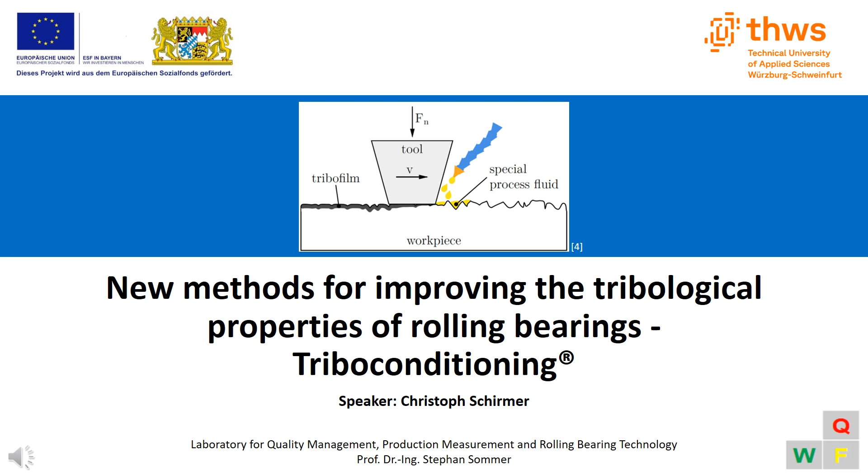Now I will briefly present the agenda. First, I'll state the motivation of this presentation, clarifying the question of why tribological properties should be improved or optimized. Then I will discuss triboconditioning. This includes the basic idea of the process, the associated surface chemistry, that is, the chemical reactions that take place during the process, and the surface topography that results from the treatment. I will conclude this topic with the surface properties that result from triboconditioning.

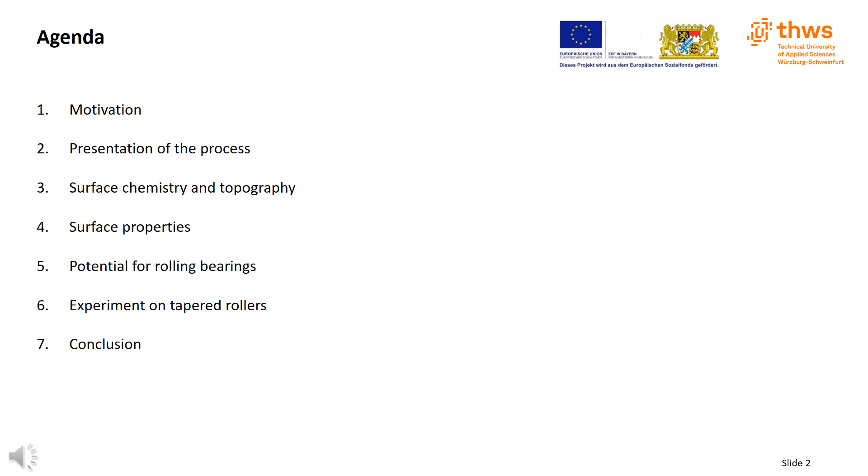After that, I will discuss the potential of the process for rolling bearings and present a first experiment that the THWS conducted on tapered rollers. In the conclusion, I will summarize the main aspects of this presentation and give a short outlook on future topics concerning triboconditioning of rolling bearings.

The energy transition and resource scarcity call for efficient and sustainable solutions. This obviously also applies to rolling bearings. One topic for achieving such solutions is the improvement or optimization of tribological properties. So what does this mean? Tribology consists of three fundamental areas: friction, wear, and lubrication. In the tribological optimization of rolling bearings, friction is to be reduced in order to minimize power losses. This results in better efficiency. Likewise, reduced wear leads to longer service lives of components and systems.

For rolling bearings, in addition to improved geometries, materials, and lubricants, special treatment and coating processes can be used to improve tribological properties. Triboconditioning would compete with conventional processes like burnishing and coating. All these processes aim to improve tribological behavior, especially under deficient lubrication.

On the left you can see a burnished rolling bearing. The surface contains various iron oxides, which improve the friction and wear behavior. In contrast to a friction and wear reducing coating and triboconditioning, burnishing additionally protects against corrosion. In the center you can see PVD coated rolling elements of a spherical roller bearing. This is a carbon coating which is very hard and reduces wear.

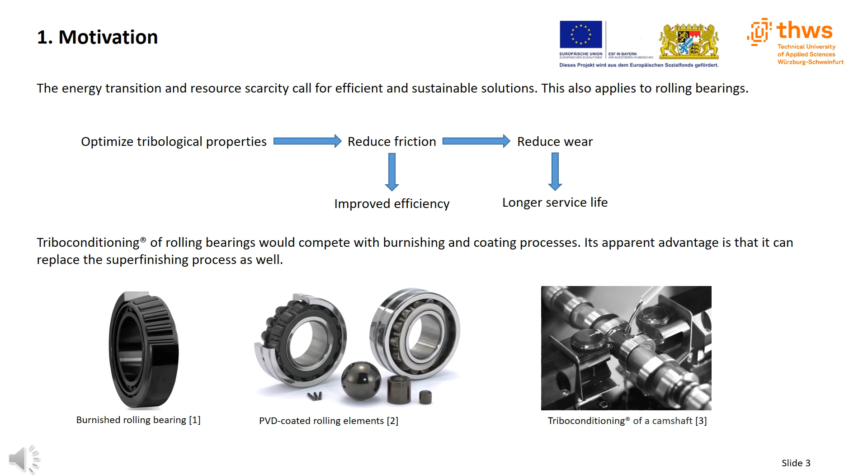Now I would like to present triboconditioning. Triboconditioning is a surface treatment method developed and patented by Tribonex, a small company from Sweden. In the left picture, the logo of the company is shown. The link tribonex.com, which can be found in the video description, takes you to the company's website. There you can find more information about triboconditioning as well as contact information. Triboconditioning is a protected trademark from Tribonex.

The aim of this treatment is, as already mentioned, the improvement of tribological properties. The illustration on the right shows the principle of triboconditioning. A hard tool is drawn over a workpiece surface with high contact pressure under continuous feed of a special process fluid. This smooths the surface, and tribochemical interactions take place between the process fluid and the workpiece. The result is a plateau-like surface with a tribofilm, also called tribolayer, which contains an embedded solid lubricant.

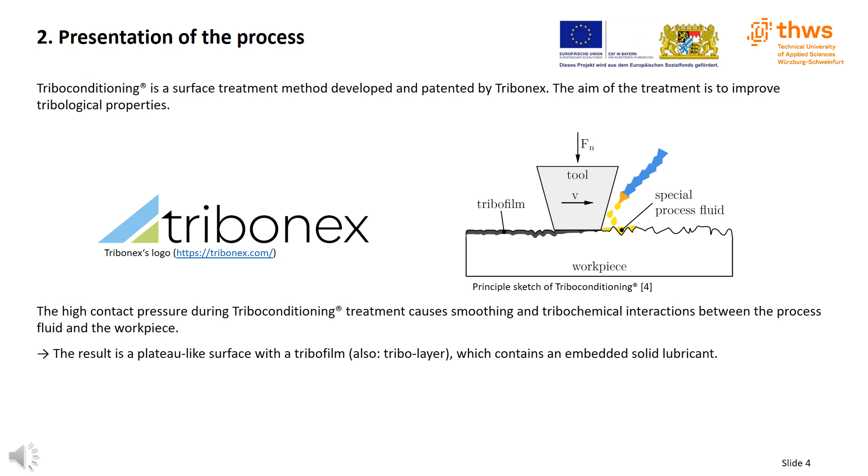Triboconditioning can be implemented in two different process variants: triboconditioning round shape, which is used for round geometries, and triboconditioning complex geometry, which is used for complex geometries and small parts. For triboconditioning round shape, shown on the left, a honing tool, a pin, or a disc can be used. All tools have in common that they are made of carbide and that the process fluid is continuously fed.

The honing tool can be used for internal geometries. It oscillates along the axis of the bore, while the workpiece or the tool perform a rotational movement. The pin can be used for external geometries. It performs a pivoting motion while the workpiece rotates. For a shaft shoulder, the disc is a suitable tool. In addition to surfaces parallel to the axis of rotation, the disc can reach shaft shoulders through face contact.

For the treatment of rolling bearing raceways, it is possible to adapt standard tools to triboconditioning. Such standard tools can be grinding and honing tools from the rolling bearing industry.

For triboconditioning complex geometry, shown on the right, basically all mass finishing processes can be used. An oil-based process fluid containing triboconditioning additives is used. The grinding media is high in density in order to generate a large impact. The preferred mass finishing processes for triboconditioning are centrifugal barrel finishing and stream finishing.

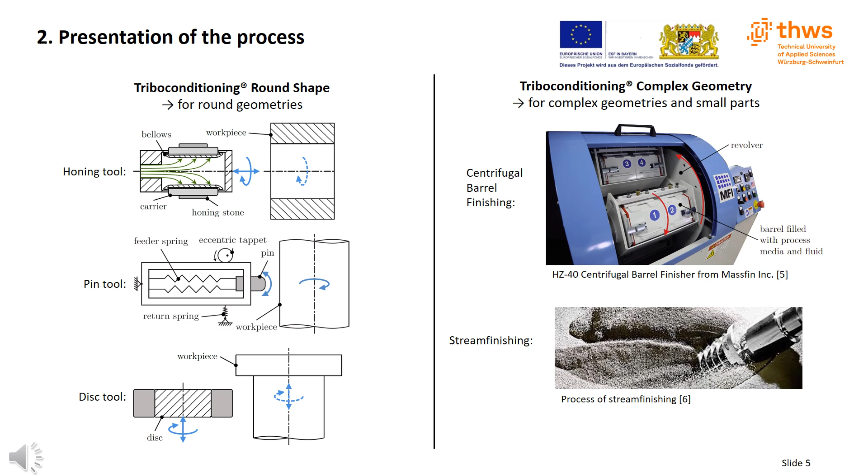For internal surfaces, the stream finishing process shown below is preferred. The workpieces are clamped on workpiece holders and immersed in a flow bath of process media and process fluid. In addition to this flow, the workpiece is rotated.

Now I'd like to take a closer look at the surface chemistry. During triboconditioning, thermomechanical influences such as heat input, abrasion of oxide layers, and deformation provide for increased chemical reactivity.

I will briefly introduce the reactions that are believed to occur during triboconditioning. The process fluid contains an organic sulfur complex RSR and tungsten trioxide WO3. Since iron is an important reactant to the reactions shown, the workpiece must be made of a ferrous material.

In the first line, the organic sulfur complex from the process fluid decomposes as a result of friction, and a sulfidation of iron from the workpiece to iron sulfide FeS occurs. In the second line, the reduction of tungsten trioxide by iron forms a tungsten trioxide complex. The above-mentioned products react to tungsten disulfide WS2 and iron oxide FeO, as can be seen in line 3. Finally, the reactions are summarized in line 4.

The tribochemical reactions shown are equilibrium reactions, occurring in regions of sufficient energy input. The tungsten disulfide represents the solid lubricant incorporated in the tribofilm.

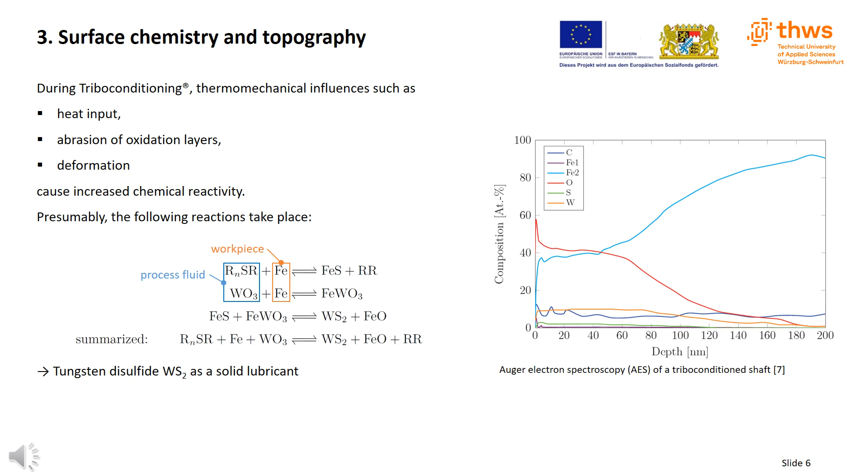In the Auger electron spectroscopy of a triboconditioned shaft, shown on the right, small but relevant amounts of sulfur up to 120 nanometers are detectable. This corresponds to the thickness of the tribofilm.

The surface topography is significantly changed as a result of triboconditioning. This is because material close to the surface is plasticized and made flowable. The peaks of the profile are smoothed and the valleys are partially filled. This results in a plateau-like surface.

The figure shows the surfaces of a cylinder liner by means of secondary electron microscopy. The left figure shows the surface before triboconditioning, the right figure after triboconditioning. It can be clearly seen that most of the finer grooves are eliminated due to triboconditioning. However, larger grooves remain. Such a topography with plateau character influences the friction behavior favorably.

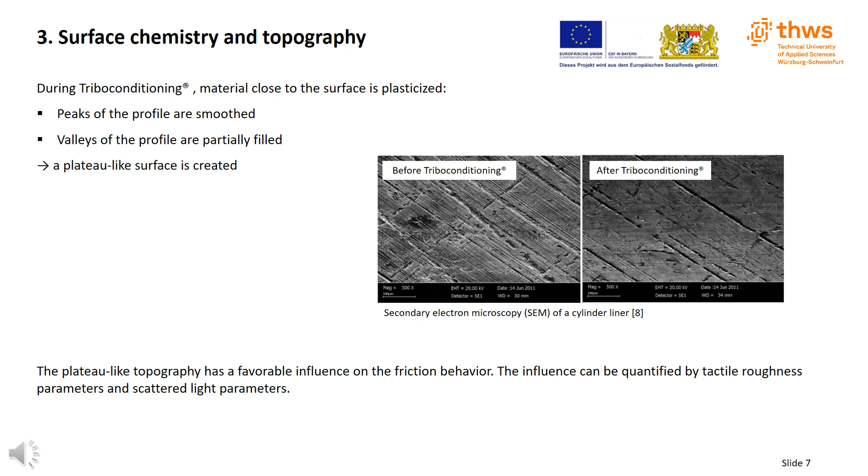The influences can be quantified via tactile roughness parameters and scattered light parameters. On this slide, I will present some tribologically meaningful tactile roughness parameters that change as a result of triboconditioning. First, I would like to briefly discuss the parameters from the material ratio curve, also called bearing area curve or Abbott-Firestone curve. On the right, you can see an exemplary roughness profile with the corresponding material ratio curve.

By graphical construction in the material ratio curve, the reduced peak height RPK, the core roughness RK, and the reduced valley depth RVK can be derived. Triboconditioning reduces all three of the mentioned parameters.

The reduction of RPK reduces wear, especially during running in. A lower RK value increases the contact area and therefore increases the load-bearing capacity. Reducing RVK slightly reduces lubricant retention.

Now briefly to R delta Q. This parameter describes the root mean square value of the local slopes of a profile. Triboconditioning makes surfaces smoother, so the value decreases. This leads to easier lubricant film formation.

RSK is the skewness of a profile, that is, the asymmetry of the amplitude density curve. The smaller or more negative this value is, the better the load-bearing capacity of the surface. Triboconditioning leads to a reduction of this parameter.

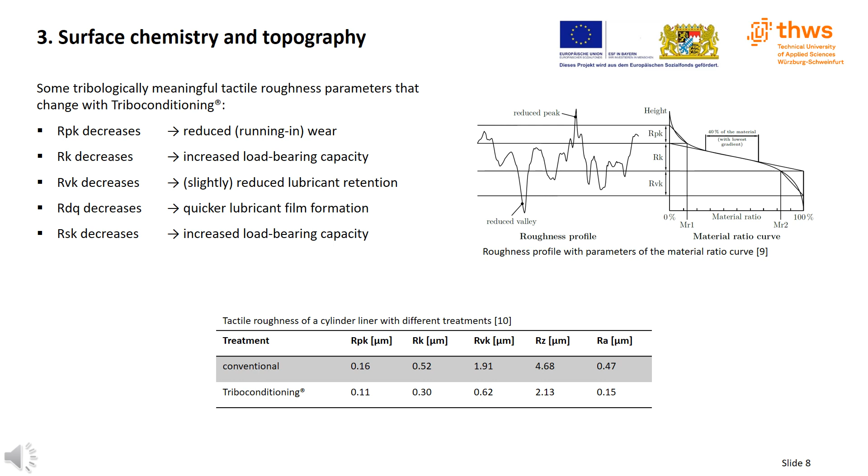The table below shows some tactile roughness parameter values on a cylinder liner. Here, conventional treatment is compared to triboconditioning. It is evident that the roughness values from the material ratio curve, as well as classic roughness values Rz and Ra, are reduced due to triboconditioning.

The result is an intensity or frequency distribution of the scattered light over the scattering angle. The scattered light parameter AQ corresponds to the variance of the scattered light distribution. Because the scattering angles are evaluated, AQ is a measure of profile slopes. The lower the AQ value, the shallower the slopes of the profile are, meaning the surface is smoother.

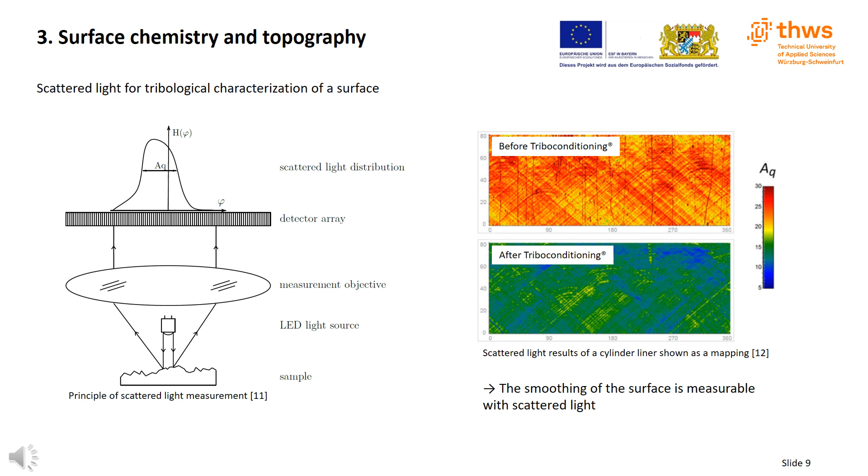The figure on the right shows the results of a scattered light mapping on a cylinder liner. The surface before triboconditioning is shown at the top and after triboconditioning at the bottom. Before triboconditioning, the AQ values are between 20 and 30. After triboconditioning, AQ values between 10 and 20 are achieved. The AQ value is almost halved, which indicates significant smoothing.

The influence of triboconditioning on the friction properties can be illustrated using a Stribeck curve. In the Stribeck curve, the coefficient of friction is on the y-axis with the Hersey number on the x-axis.

At low Hersey numbers in the dry friction regime, the solid lubricant tungsten disulfide reduces friction (C1). Furthermore, the range of mixed friction is shifted to the left towards higher loads and/or lower speeds (C2). This is due to the plateau-like surface that facilitates lubricant film formation.

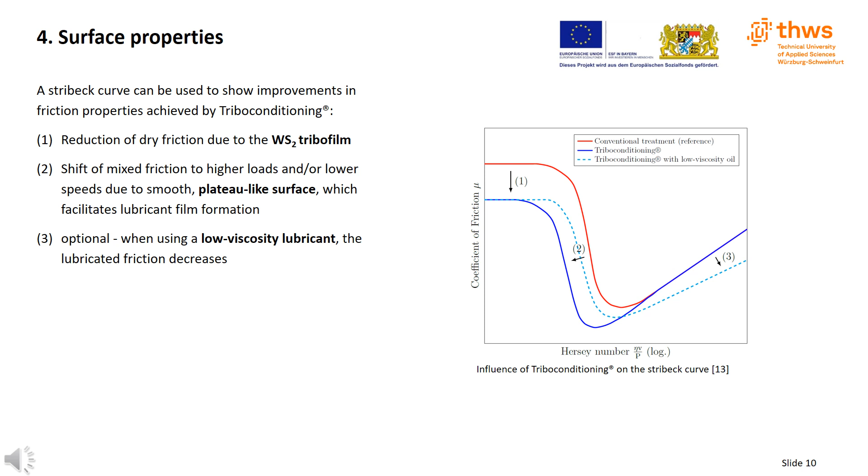Optionally, triboconditioning allows the use of a low viscosity lubricant. Although this shifts the range of mixed friction somewhat to the right, the lubricated friction, that is the friction at higher Hersey numbers, decreases (C3).

The wear of a triboconditioned surface is also reduced. There is low running-in wear and less fatigue damage because the smooth surface profile contains hardly any prominent profile peaks and has good load-bearing capacity. Furthermore, the tribofilm offers a certain resistance to cold welding.

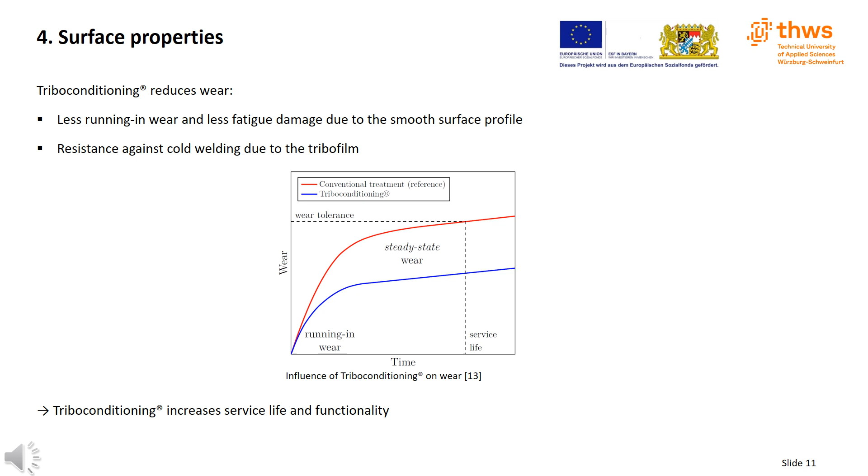As a result, the amount of wear at the beginning of the so-called steady-state wear is lower than that of the reference part. At a given tolerance level, this leads to a longer service life and increased functionality due to triboconditioning. During operation, wear of the tribofilm cannot be avoided.

However, there is a self-regenerating effect due to tribochemical reactions between the surface and the lubricant, or rather its additives. Therefore, the reactants of triboconditioning must be matched to the lubricant in the subsequent application. Thus, unfavorable triboreactions associated with adverse changes in the properties of the surface can be avoided.

An alternative for tungsten is molybdenum. Furthermore, sulfur can be substituted by phosphorus.

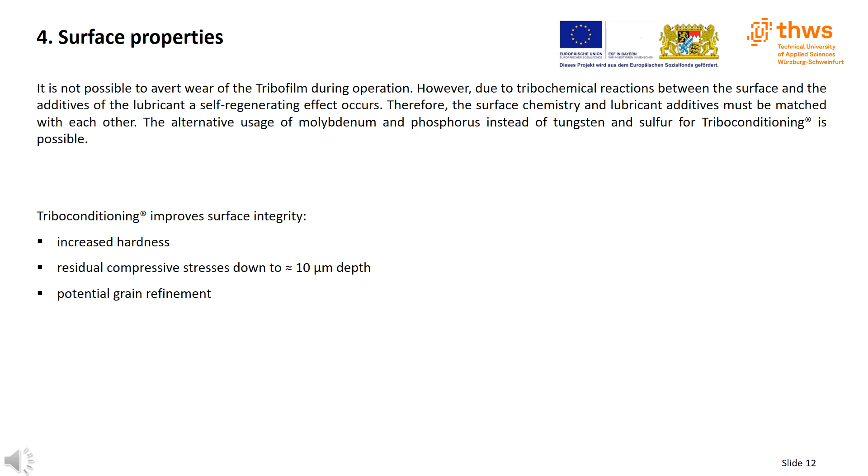In addition to friction and wear behavior, triboconditioning also improves surface integrity. The near-surface compaction leads to increased hardness and residual compressive stresses down to a depth of approximately 10 microns. In addition, grain refinement can potentially occur due to deformation and friction during triboconditioning. This would have a positive influence on strength, toughness, hardness, as well as tribological properties.

For rolling bearings, triboconditioning is particularly relevant in the presence of temporary insufficient lubrication. The cause of insufficient lubrication in rolling bearings is poor friction conditions that prevent the formation of a load-bearing lubricant film. Such conditions exist, for example, during startup and shutdown of rolling bearings. In addition, low speeds paired with high loads can lead to insufficient lubricant film formation.

In large bearings, the rolling elements are extremely accelerated when they enter the contact zone, which can tear the lubricant film open and thus also result in solid contact. This is referred to as slip in rolling bearings.

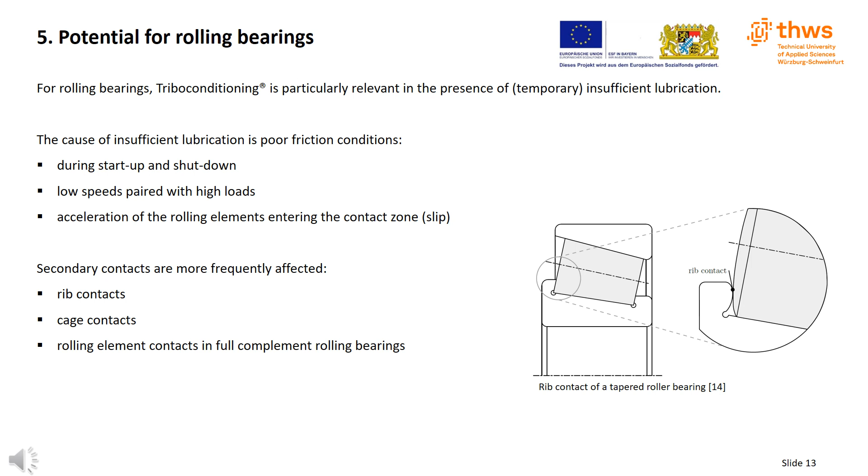With conventional finishing, a honing or superfinishing follows in order to adjust the surface quality and cut roughness peaks. Then the component is burnished. Iron oxides are formed on the surface which improve the tribological behavior and have a passivating effect.

With triboconditioning, the last mentioned processes of superfinishing and burnishing can be combined in one. Like superfinishing, triboconditioning improves the surface quality, and like burnishing, triboconditioning changes the surface composition by incorporating iron oxide FeO. In addition, a solid lubricant such as tungsten disulfide is produced.

Adapted standard tools and mass finishing processes can be used to apply triboconditioning to rolling bearing components. The only requirement is that the components must be made of a ferrous material, for example steel or cast iron.

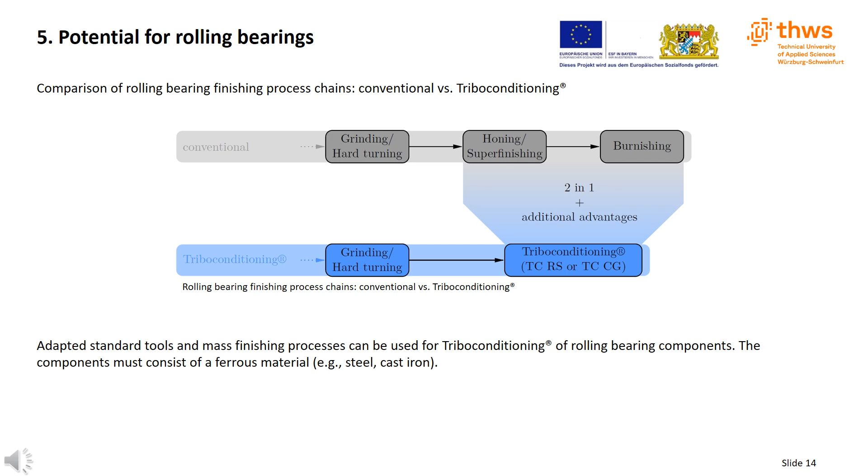To investigate the effects of triboconditioning on tapered rollers, an experiment was carried out. The subject of the investigation were 10 tapered rollers from a passenger car wheel bearing. 5 were left in the standard, honed condition, and the other 5 were additionally triboconditioned. The two test groups are referred to as Standard and Tribonex.

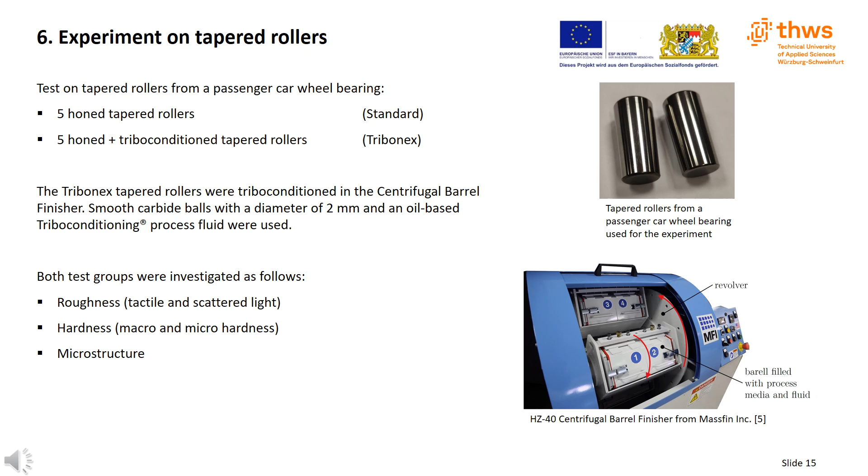In both test groups, the roughness was measured tactilely and with scattered light. In addition, macro and micro hardness were checked. A possible difference between the micro hardnesses could indicate an increase in residual compressive stresses due to triboconditioning. Finally, the microstructure was examined under an incident light microscope to detect potential grain refinement.

At the roller circumference, no influence of triboconditioning can be determined - that is the direction of the grinding process. At the roller face, RPK remains unchanged. RA, RK and RVK decrease by approximately 25%, and R delta Q decreases by approximately 38%.

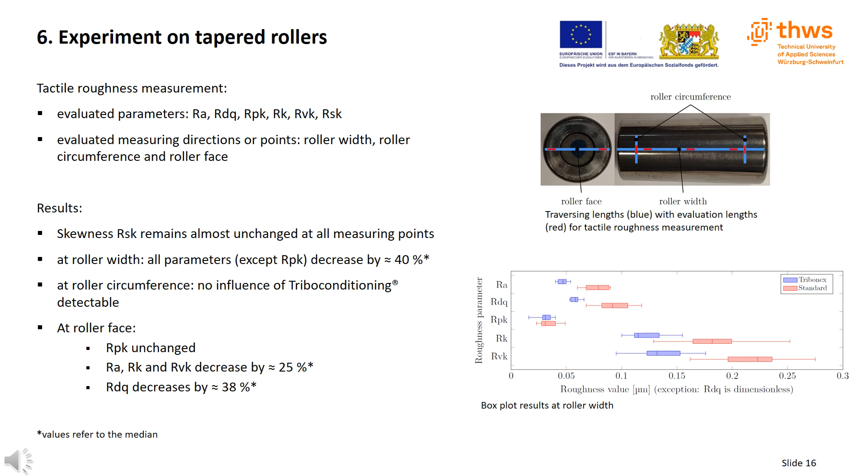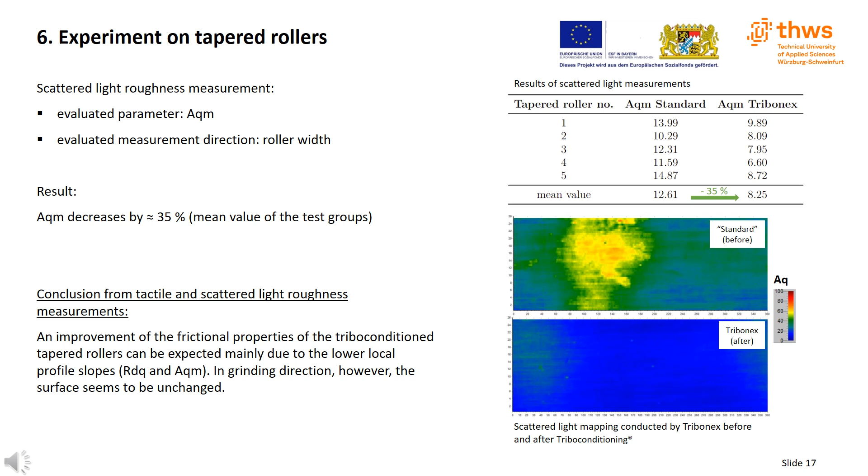From the tactile and scattered light roughness measurements, it can be concluded that an improvement of frictional properties of the triboconditioned tapered rollers can be expected. This is mainly due to the lower local profile slopes R delta Q and AQM. However, the influence of the process on the surface in grinding direction is limited.

Now to the hardness results. Regarding macro hardness, no change was observed due to triboconditioning. Both test groups have a hardness of approximately 60 HRC. Minimal deviations between the test groups are within the range of measurement uncertainty.

Triboconditioning slightly increased the micro hardness. This is an increase of 24.3 HV1, which corresponds to a relative increase of 3.2%. Although this deviation is also within the range of measurement uncertainty, the difference could be an indication of increased residual compressive stresses near the surface. But in order to make a reliable statement, the residual compressive stresses would have to be investigated separately.

Following the microstructural examination, there was no indication of grain refinement due to triboconditioning. The Standard and Tribonex tapered rollers had a homogeneous martensitic microstructure with iron chromium carbides.

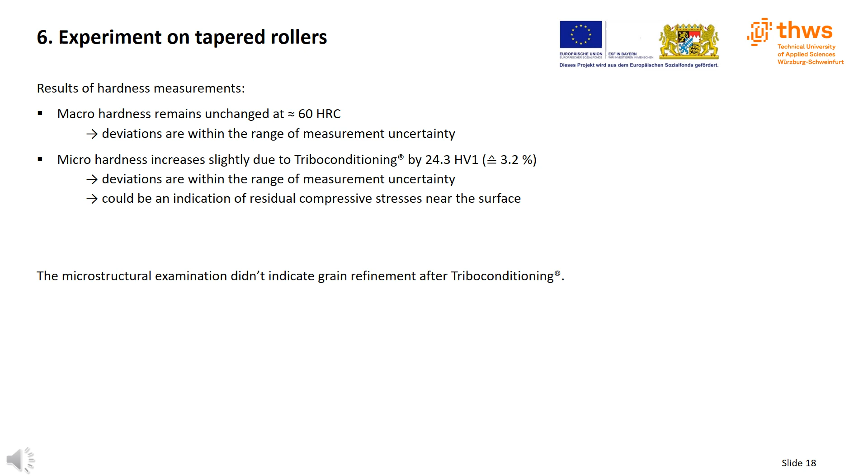To close this presentation, I would like to draw a brief conclusion. I will summarize the presented contents and give an outlook on possible follow-up investigations. The improvement of tribological properties in rolling bearings due to triboconditioning can be divided into 4 points.

First, triboconditioning leads to lower boundary friction and a reduction of adhesive wear as well as fatigue damage. This is due to the tribofilm. The smooth surfaces with low profile slopes R delta Q and AQM provide improved lubricant film formation and low running-in wear. High wear resistance and resistance against subsurface fatigue damage are achieved by the hard surface with residual compressive stresses down to 10 microns depth.

Lastly, potential grain refinement of the boundary layer would result in increased strength, toughness and hardness. Especially secondary contacts in the rolling bearing, such as rib and cage contacts, benefit from the improved friction and wear behavior under insufficient lubrication. Triboconditioning has the potential to replace a superfinishing and burnishing or coating process.

An initial investigation on tapered rollers shows the potential of the process regarding surface topography. Further investigations are required to better assess triboconditioning. These are, for example, rolling bearing specific tribo tests, the comparison of triboconditioned rolling bearings with burnished or coated rolling bearings with regard to technical and economic aspects, and a residual stress analysis, for example by means of X-ray diffraction.